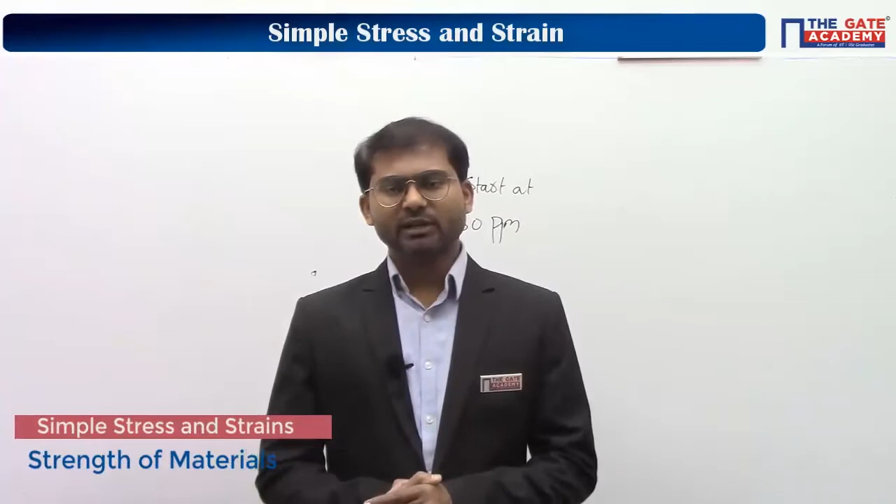If a metal can undergo plastic deformation before fracture, it means it is a ductile material. If a material cannot undergo plastic deformation before fracture, it should be called a brittle material. And later we have seen the definition of failure, definition of strength and all, and we have understood that ductile materials fail by yielding and brittle materials fail by fracture. Okay, so we should keep in mind that though ductile materials won't experience fracture at the phenomenon of yielding, still we discard them and take that failure has happened. So we should be very careful. Only in brittle materials we will wait till fracture to happen.

Okay, and we also saw a couple of things. When you are releasing the load from the plastic region, from the start of plastic region, that is after point C, after yield point, you will be regaining some amount of strain, but not the complete amount of strain. So the remaining amount of strain will be left over. Okay, so some amount of permanent strain will be left over on the material. Now from that condition, if you again load it, you will observe that the yield point will increase. Okay, so this is a phenomenon from point C. So whether you do it in the plastic region or in the strain hardening region or necking region, this is a phenomenon there. So you'll be having a higher value of yield point.

Clear? So this is used in manufacturing metal forming operations, because if you do plastic deformation by metal forming operations, we are increasing its yield point. So at a microstructure level or at a microscopic level, what is happening is the defects are getting closed up, and that is giving rise to an increase of yield point. So as far as our SOM subject is concerned, we are concerned only about increasing the value of yield point. Okay, I mean, we are concerned about the output itself. We are not concerned about how it actually has happened. So we'll study those things in the subject of metal science or manufacturing engineering.

So they mean that as we are approaching from point P to point Q, the slope of the curve is non-zero. So nowhere is the slope actually equal to 0. Where the load was stopped, from the point Q, the specimen was unloaded to point R, where the stress is 0. If the same specimen is reloaded in tension from point R, the value of stress at which the material yields again is. So here, if you observe, your correct answer should be more than 180 megapascal.

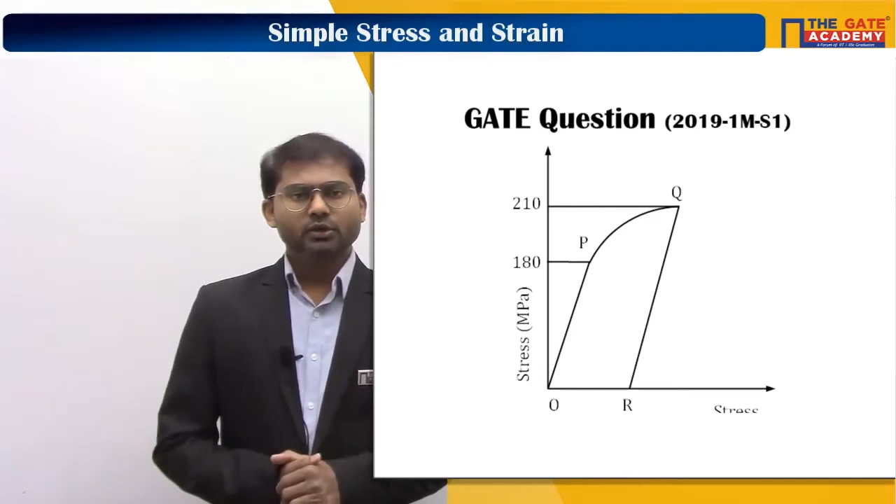So before, when there was no loading at all, no deformation at all, the yield point or the strength of the material was 180 megapascal. Now we have stressed or deformed beyond this point, and then we have unloaded. Now if you again load it, the strength will come more than 180 megapascal, and here we see that the curve is going till point Q. So we can simply say yielding happens at point Q, that is 210 megapascal. So the correct answer is 210 megapascal itself.

Roshan, you have thought partially, whatever you thought partially is right only, but ultimately your answer is wrong.

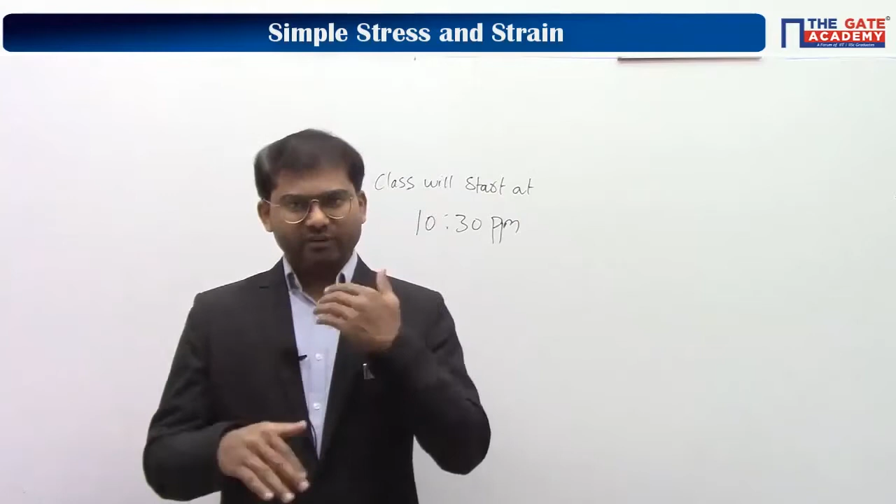So the value of yield point should be more than 180 megapascal, and here from the graph we don't have any other number to tell, so we can say it will be 210 megapascal. Clear? That is the answer for this question.

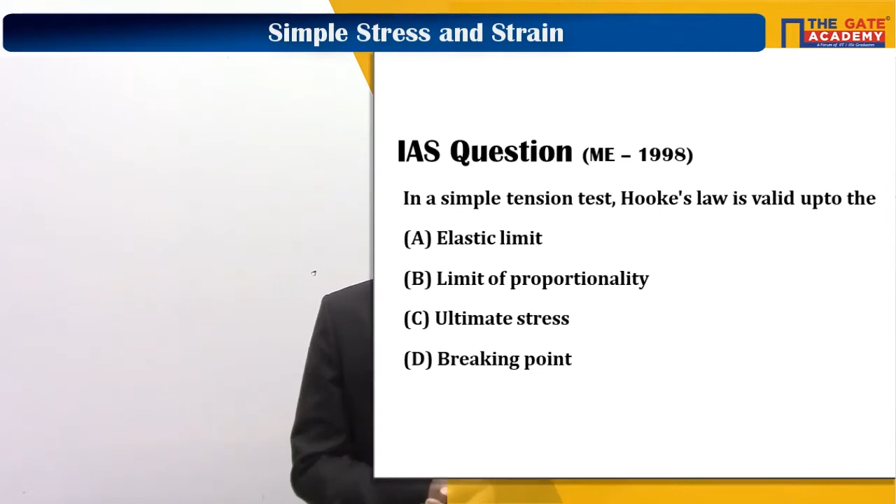This question is about making you think about Hooke's law. That's why I kept this as a question here, and it's a previous IAS question as well. The correct answer is actually B, proportionality limit or limit of proportionality. Why it is, I would like to explain by giving the history of Hooke's law, or a complete explanation of Hooke's law, from which you'll understand why it is valid up to the limit of proportionality only.

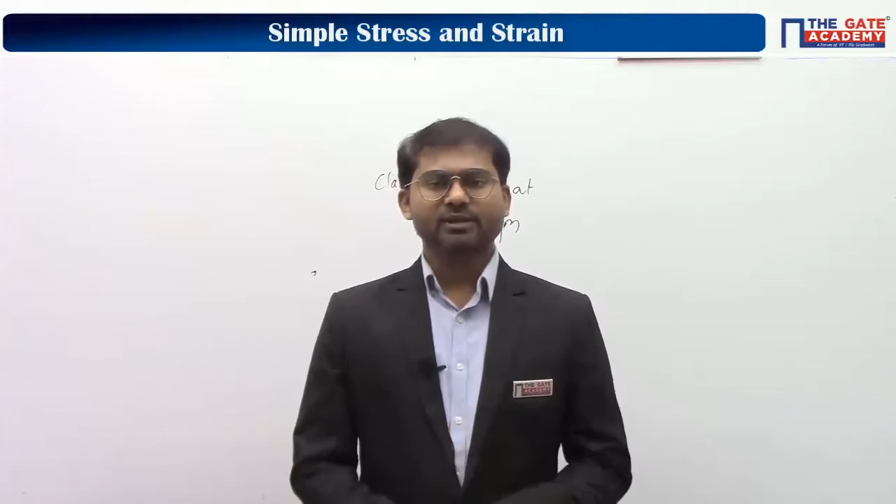Regarding this, there is a huge confusion in many textbooks, between many authors and faculties as well. But the correct answer for this one is limit of proportionality. So why? You can understand from the explanation part. Hooke's law came into existence when spring and force systems were used. When spring and force systems were used, it was very clear that force was proportional to elongation.

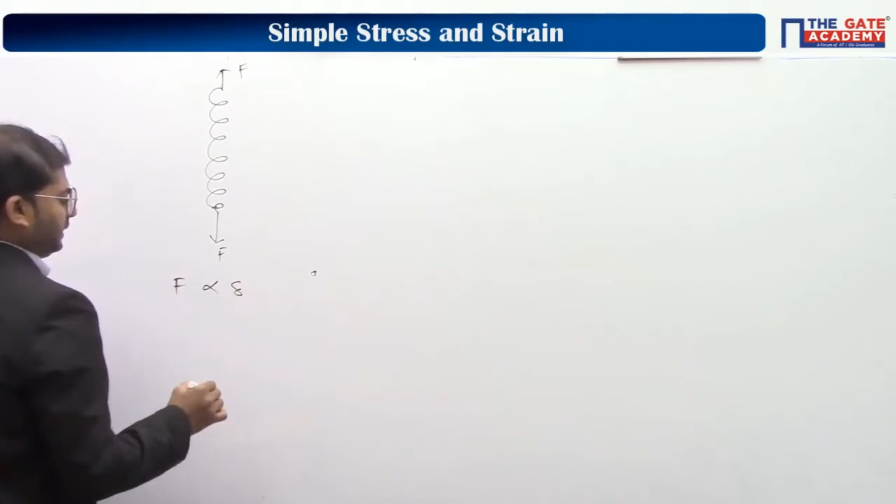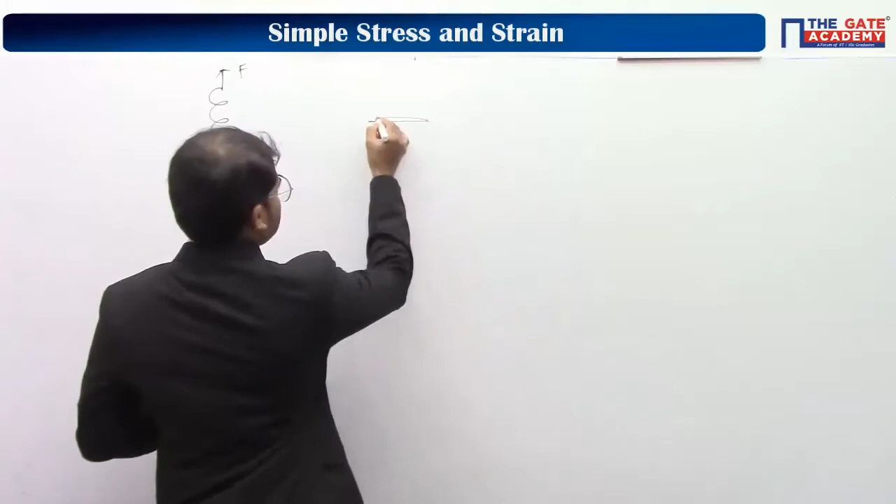That means if you increase the value of force by some factor, elongation is also increased by the same factor. If you are doubling the force, elongation is being doubled. If you are tripling the force, elongation is also being tripled. So it was observed there. Understand? Same behavior was also observed when solids are deforming elastically. If you take this force as P, the elongation produced is proportional to the applied force P.

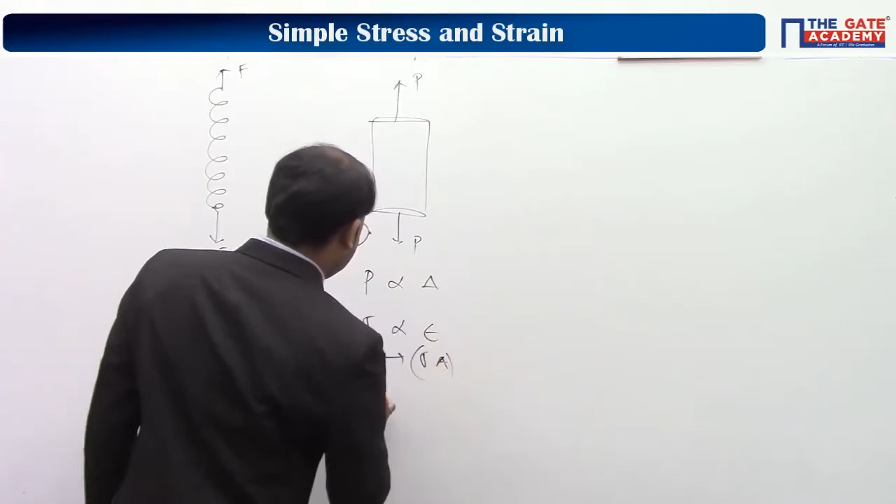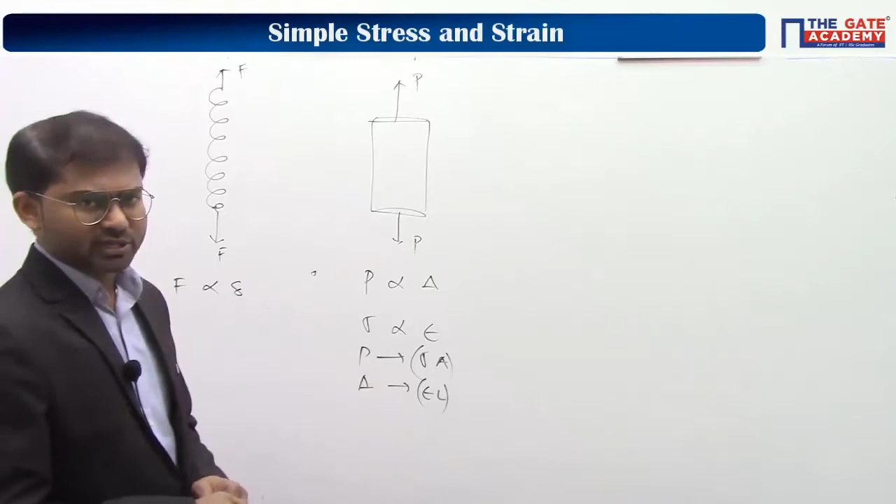Here, if you remove all the constants, you can write it down as stress proportional to strain. How will it come? If you write force as stress into area of cross section, and elongation as strain into length, then area and length you can cancel out because they are constants, since we always take initial or conventional values. So you will get stress proportional to strain. Strictly speaking, this is Hooke's law. So we use this one also.

Still, till now there is no strict question where it was asked whether this or that is the correct Hooke's law. Correctly speaking, the better answer is P proportional to delta. The next better answer is sigma proportional to strain. But till now no question came in such a way at that level, so you can consider both equations the same. Hooke's law can be denoted by load proportional to elongation and stress proportional to strain.

In Hooke's law, if you write stress proportional to strain, epsilon to the power 1 is coming. So stress and strain should be linearly proportional. If you observe the stress strain curve in tension, because we are dealing with linear stress and linear strain, normal stress and normal strain only, it is a straight line till the proportionality limit. After the proportionality limit, the elastic limit will come, then the yield point will come, where this straight line phenomenon is not maintained. So Hooke's law is valid up to the proportionality limit only.

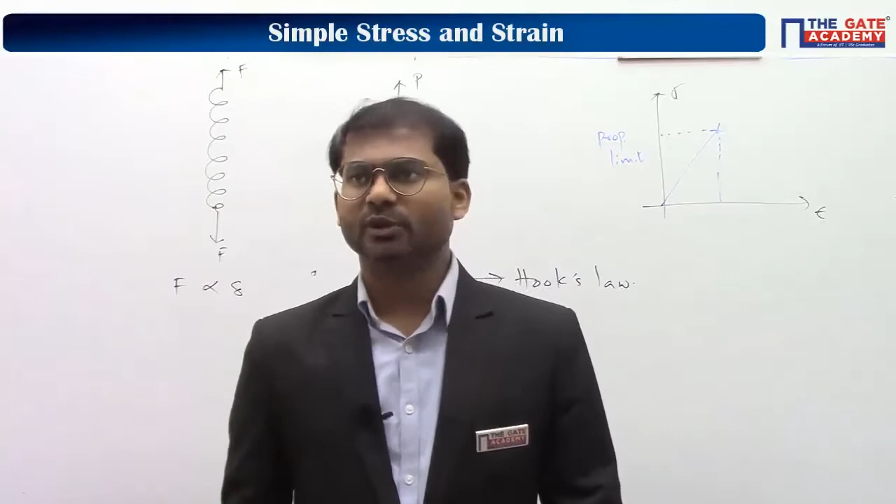Understand? Clear? So you can copy. Once you are done copying, I will tell you one very important point, because there are a few conditions where Hooke's law is not valid. We study them, but we always forget. We never cross-think whether Hooke's law is valid or not, so we are going to look into that case. Kindly copy this and let me know. Please be a little fast in copying, so we can save time for solving the numericals.

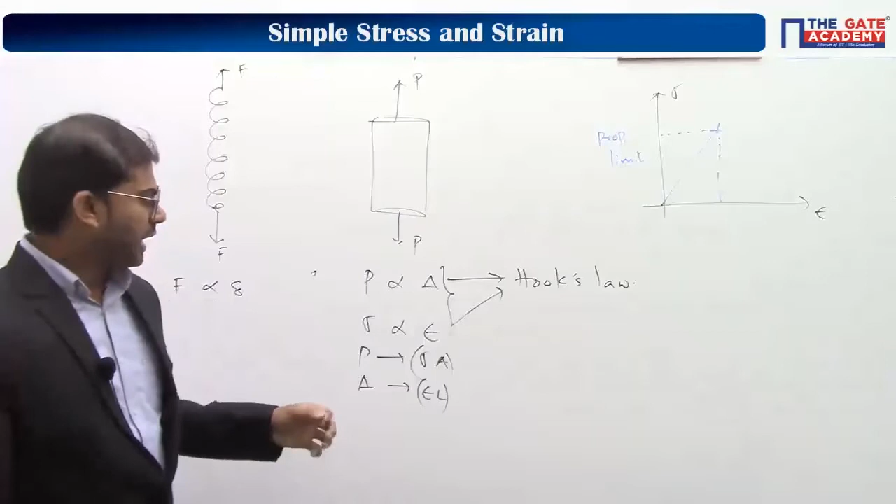So it's done. Others also. Please remember that Hooke's law is valid when stress and strain are produced by mechanical means. That means the stress and strain should be produced by either forces or pressures. That's all. If stresses or strains are produced by any other means like thermal means, increasing temperature, etc., you can't expect Hooke's law to be valid. For example, take a free rod heated to expand. There you will see strain is always non-zero, but stress is always zero.

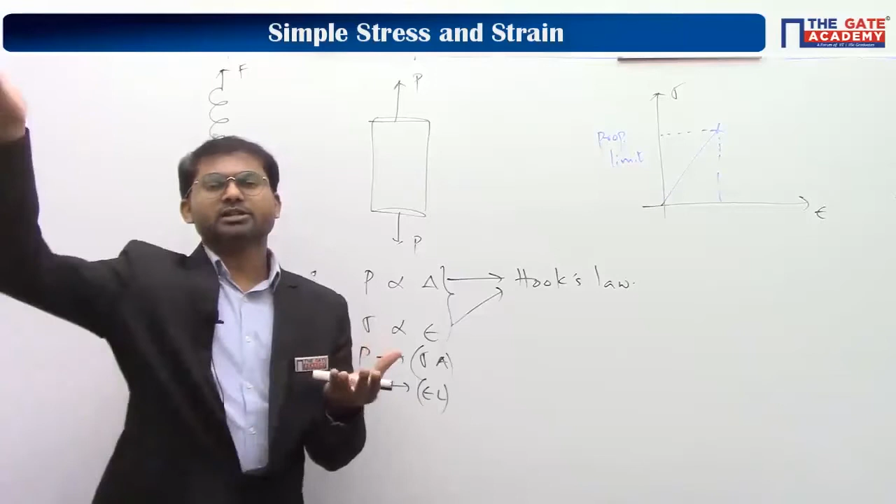Due to change of temperature, strain will be produced, but stress will never get produced. Stress will always be zero there. So strain is going on increasing, but stress is always zero. So you can't say proportionality is valid there. Please remember, this Hooke's law is valid only for mechanical cases of stress and strain.

So I would like to first of all explain the difference between measuring and calculating. Measuring means you will be getting that value directly from the readings. For example, you take the density of a material. Understand? Okay. So fine. Let's say volume.

For example, you have a cuboid and you'd like to measure the value of length. So you always say we measure the value of length. We don't say we calculate the value of length, because you will be using some setup or some instrument which will be giving you that reading directly. So using the measured values of length, breadth, height, you will be calculating volume. Understand? Okay, and if you use a weighing machine, you'll be measuring the value of mass. So you will not calculate mass, you'll be measuring the value of mass.

So once you measure mass, once you measure the value of dimensions, you can calculate some other values. Using length, breadth and height, you can calculate the value of volume. So I hope you are very much clear. The readings which you can directly get from the instruments are called measurements, or measured values, and whichever you get by using a formula should be called calculated.

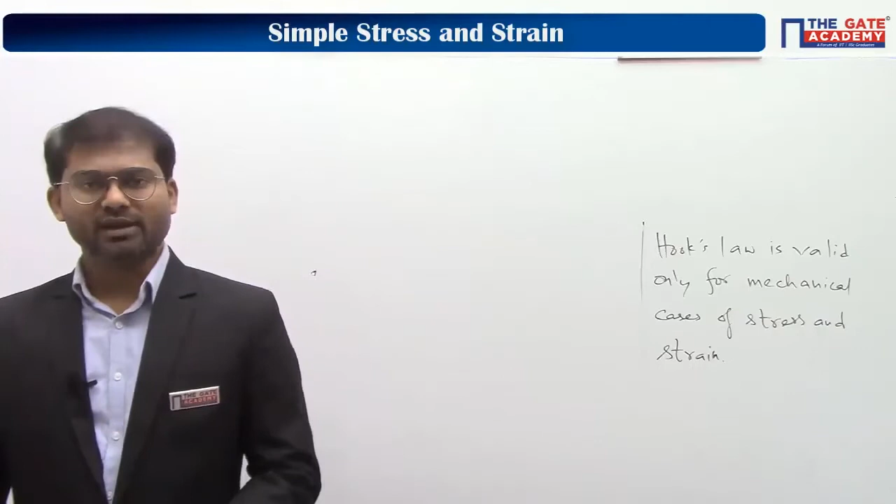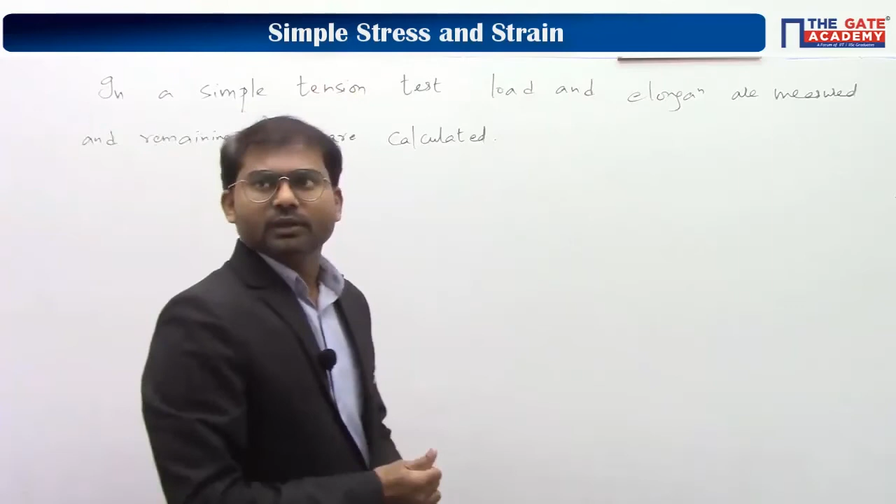Okay, let's go ahead with the next terms, elasticity and ductility. Kindly copy first of all. After that, I will go ahead with explaining. Elasticity and plasticity are opposite to each other, and plasticity decides the ductility phenomena.

Elasticity is the property of the material by which, once you release the load, it is able to regain its original shape and dimensions. Plasticity means not able to regain its original shape and dimensions. Now, ductility is completely based upon plasticity. It is how well the material can undergo plastic deformation before fracture.

For example, you take two rubber bands. One rubber band can undergo, let's assume, plastic deformation up to this length before fracture. Once you stretch up to this length, it will undergo breakage. But the other rubber band will undergo elongation up to this greater amount before undergoing fracture or breakage. So the second one is more ductile than the other. The ductility is completely based upon the plasticity behavior. So ductility is the ability of the material to change its shape and dimensions plastically before fracture.